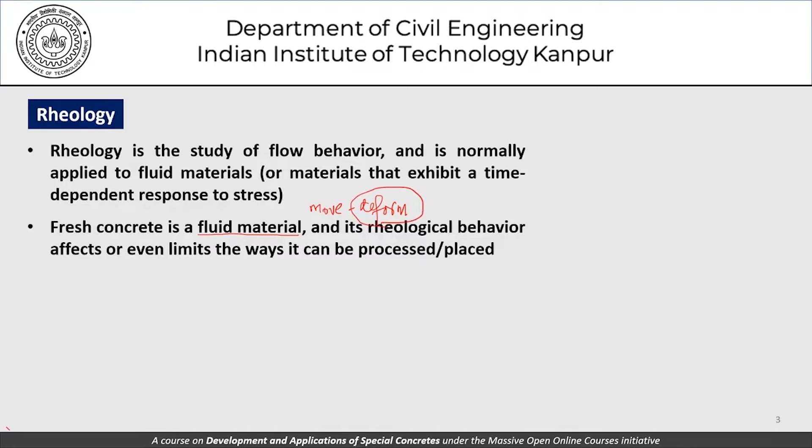When we say it's a fluid material, something like roller compacted concrete would be difficult to visualize as a fluid. Other concretes, self-compacting or not, do try to behave like fluids. But even with stiffer concretes, as we apply vibration and try to compact them, we expect the concrete to move and deform, and this deformation is also part of rheological studies. That's what we need to understand a little bit.

Even though I've made a conscious effort to stick to engineering and applications for most of our discussion, today's discussion is focused on the science part of it - what are the principles that govern the kind of behavior that we have?

Slump is a rheological measurement, but it does not describe the entire rheological behavior. Recall how the slump test is carried out - we fill concrete in this cone shape and then remove it. The concrete acquires a different shape, so there is surely some deformation, and to that extent it is a rheological measurement. Except that we don't use the words rheologists would use - words like viscosity, yield stress, and so on, which are closely associated with rheological measurements, as we will see today.

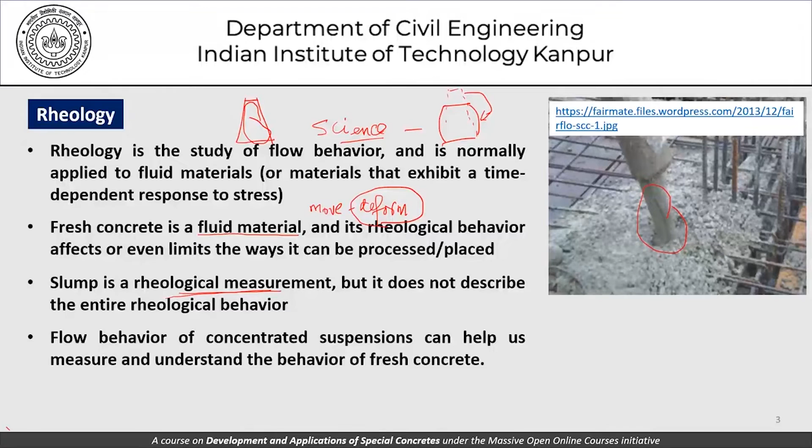Flow behavior of concentrated suspensions can help us understand and measure the behavior of fresh concrete. This fresh concrete is not a homogeneous material - it is heterogeneous, actually a concentrate of particles. It is not a single phase material; it has water, cement, sand, coarse aggregates, some chemical admixtures, and at times mineral admixtures thrown into it. So basically it is a suspension of different particles in water.

Instead of looking at concrete as a suspension of cement, sand, and coarse aggregate in water, the model I've been proposing is that we split this discussion into stages: paste is a suspension of cement and water, mortar is a suspension of paste and sand, and concrete is a suspension of mortar and coarse aggregate. So if we want to study the properties of fresh concrete, we can begin with a study of what's going on at the paste phase.

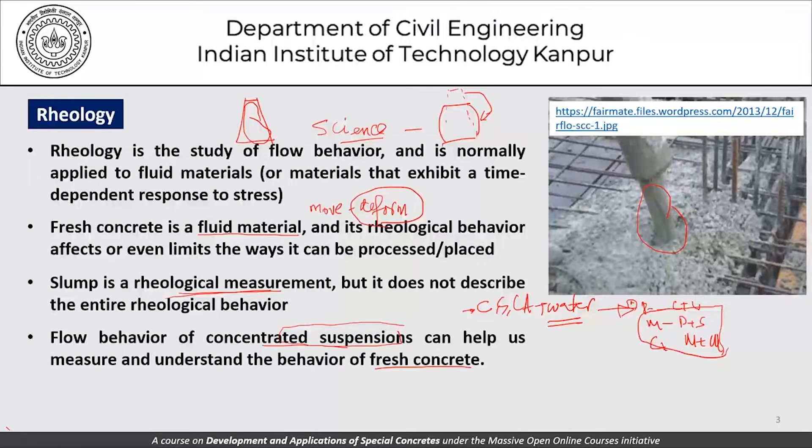How to measure the flow? The flow is typically measured using shear parameters of stress and strain rate, which are normally obtained from direct measurements of torque and flow rate in rheometers. So rheometer is the device that we commonly use in this branch of science, rheology.

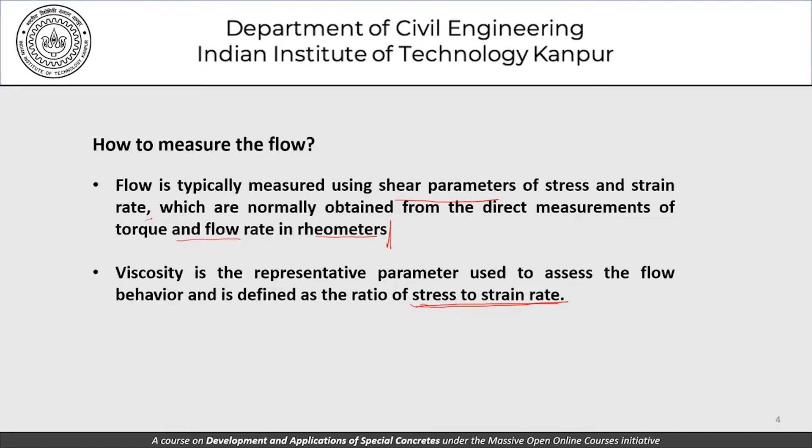Viscosity is the representative parameter used to assess flow behavior and is defined as the ratio of stress to the strain rate. Not stress to strain, but the ratio of stress to strain rate. That is how we are trying to define viscosity in the context of our discussion today.

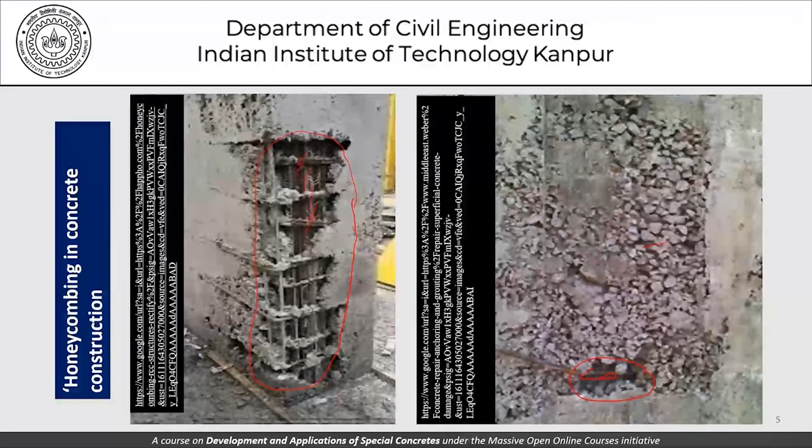But from the science point of view, what causes the concrete to move into all these places, either on its own weight, in which case it becomes self-compacting concrete, or on account of the application of vibration or compaction, carrying out external work as far as that concrete is concerned.

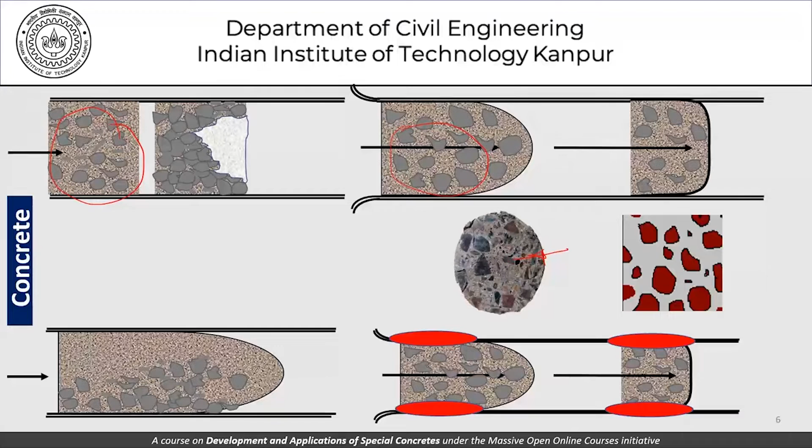These pictures again remind us that we are talking of concrete being a suspension of particles in water. We can look at it in different phases, and this is our hardened concrete. Beyond a certain point, concrete cannot be deformed so easily. It sets, gains strength, and so on.

And this is the real picture as far as concrete is concerned. The rest of it is all models, pictures that we draw to help us use scientific principles and write equations to predict or better understand the behavior here. This picture is for segregation, this is aggregate interlock, this is for development of boundary layers where we may have some deposition of materials. These are things we have talked about in earlier lectures also.

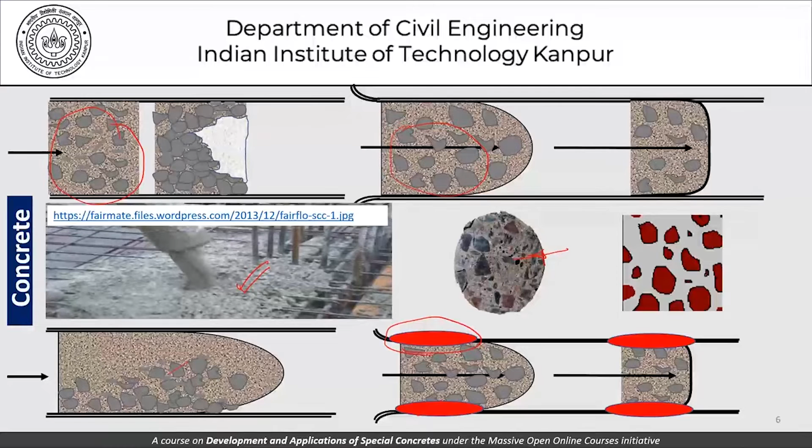Now the self-compactability part, relevant even from the rheological point of view—one thing we need to do is, on one hand, increase the water-powder ratio, that is, increase the water, reduce the powder. That will give us increase in deformation or deformability. So we increase deformability because that's what we want from concrete.

But as far as viscosity is concerned, we want to decrease the water-powder ratio, that is, reduce the water and increase the powder. So if there is a paste which has a lot of powder, that is, the solid component is very high, then it will be viscous and difficult to deform. Whereas if it has less powder, it will be much easier to deform, because that means this is more fluid—this is less fluid, if you want to use that word.

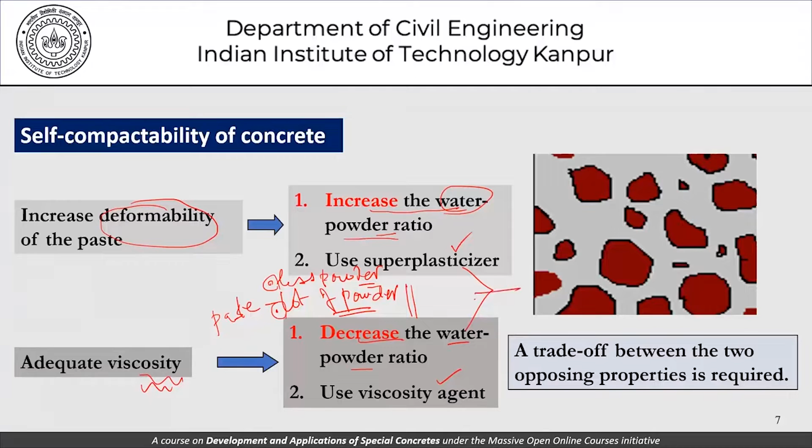This can be achieved using a plasticizer, whereas this can be achieved using a viscosity agent. So as far as real life application is concerned, we've been trying to talk about this all the time—we want to trade off between these two diverging requirements. This is just another statement arising from there.

When we use a plasticizer and reduced water-powder ratios, all that happens is that we need to restrict our coarse aggregate volumes. This is something we've talked about as far as most concretes are concerned.

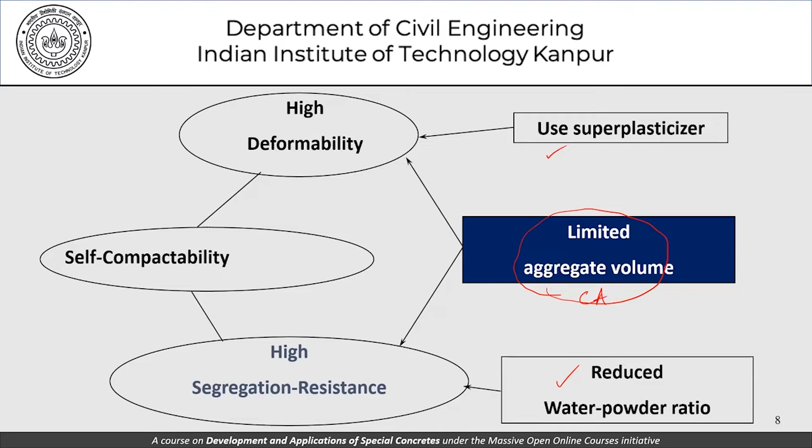This is some experiments done to better understand the tendency of blocking, especially near the reinforcing bars. Now these experiments need not be carried out using coarse aggregate themselves—we don't have to use coarse aggregates of 20 mm, because if we want to use 20 mm coarse aggregates, there are issues relating to the size of the equipment and, as you shall see, the details involved therein.

But if we are able to do some experiments the way they are listed here, for example, coarse aggregates in concretes are simulated by larger sand particles, and the concept is then extended to concrete. So the larger sand particles could be any diameter—it's not necessarily that we are sticking to a 4.75 mm definition for sand. We could use some particles and say, okay, this is how we are going to model it and move forward as far as our results are concerned.

Shown are the results from mortar tests carried out with varying sand content and hole diameters. Now what is the experiment? We fill this part with mortar—we have a cylindrical vessel, fill it with mortar, and we have a piston which has certain holes. 5 mm, 10 mm and 15 mm diameter holes were made in different pistons.

There is a cylinder of 100 mm diameter. In this 100 mm diameter cylinder, we are trying to drive a piston into a mortar, and this piston has holes of 5, 10 or 15 mm. This mortar has sand, whose particle size, gradation, and volume can be changed.

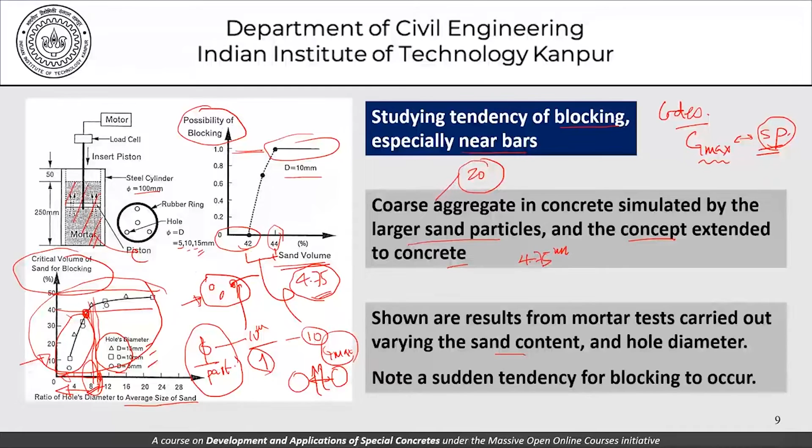So having discussed one set of experiments in the previous slide, let's discuss another set of experiments. Now this is carried out using a mini slump cone.

We know a slump cone for concrete has a diameter of 100 mm at the top, 200 mm at the bottom, and a height of 300 mm. The mini slump cone, which is used for mortar, measures 70, 100, and 60, as shown here. Please note these values are actually the diameters being shown.

We take different pastes and mortars at different water to powder ratios, varying the ratio and using either the cement paste or the mortar. We perform a mini slump test and measure the final area, which is the spread of the mortar achieved after lifting the mini slump cone off. We take the mean of R1 and R2.

The initial area is known since the initial diameter is 100 mm. From this we can find what is defined as the relative flow area, which is the final area minus the initial area, divided by the initial area. This becomes a measure of the flow.

If this relative flow area is plotted against the water to powder ratio, experiments show this is the line it follows for paste, and this is the line it follows for mortar.

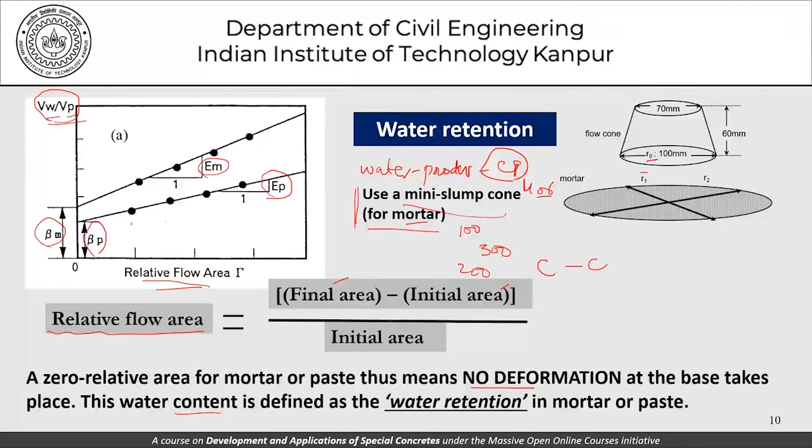These two experiments give insight into what engineers do to understand the flow behavior of concrete. We've insisted that concrete can be looked upon as a suspension of coarse aggregate in mortar, mortar as a suspension of sand in paste, and paste itself as a suspension of cement and similar particles in water.

Going backwards from here, we try to understand the properties of concrete. The importance of these tests is twofold: the effort involved is a lot less because we can work with smaller samples, like the mini slump cone. We don't use as much material, it's easier to carry out the experiments, and we can do more experiments in a given period of time.

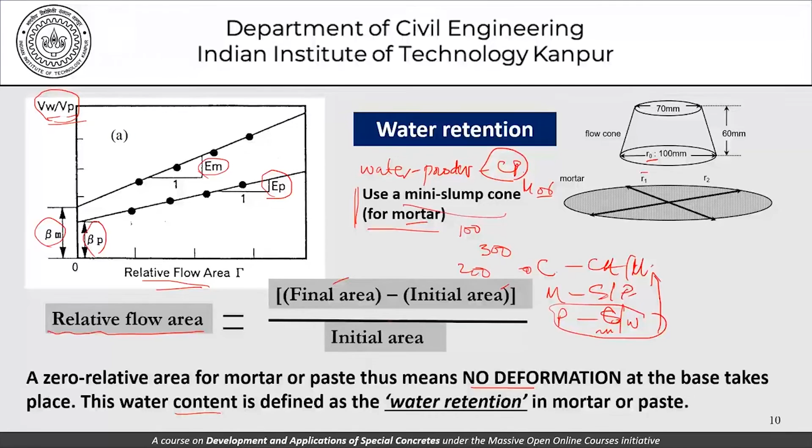With this background, we go back to our fundamentals. A suspension is solid particles dispersed or flocculated in liquids. This is exactly what cement paste is.

You'll recall I suggested an experiment where you take about a liter of water in a measuring cylinder and suspend or mix about 100 grams of cement into it. Don't worry about the water cement ratio — we're only trying to see how a suspension of cement particles in water behaves.

You can try this experiment now with this understanding, using cement, fly ash, or any other fine material, and study the characteristics of this suspension in terms of its flowability, depending on how much solid you add to it.

The key factor affecting the flow behavior of suspensions is the volume of solid particles, Vs, and an increase in Vs causes an increase in viscosity. As we increase the solid volume in this kind of suspension, we can expect an increase in viscosity and a degree of agglomeration or flocculation, which is a result of interparticle forces.

If you carry out these experiments, you will realize that there is a certain amount of flocculation that happens as far as cement is concerned, and that is what changes the behavior of the suspension for a given amount of cement that is being put into it.

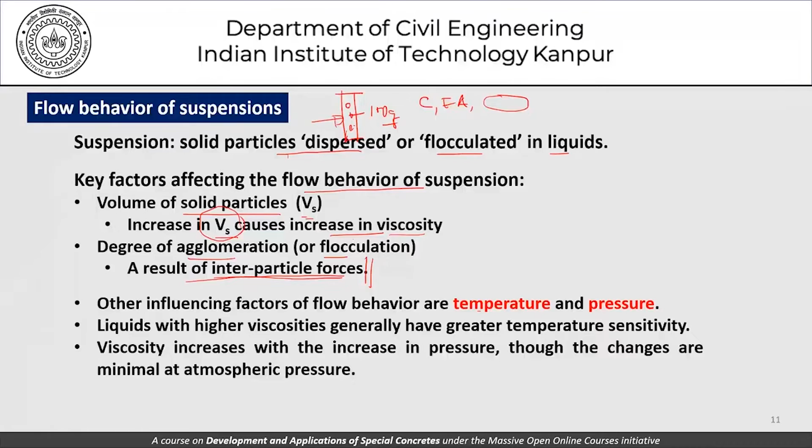Now, having seen some of the very simple engineering experiments relating to flocculation, relating to the behavior or the study of deformation in fresh paste and fresh mortar, let's try to get started with some real simple understanding of rheology.

As far as rheology is concerned, we are concerned with the behavior of fluids under stress. So what we do is we study the behavior of stress relating to strain rate. We have Newtonian fluids for which the strain rate and stress is linearly related, and we have Bingham plastic fluids for which the relationship is linear but with an offset. Then there are more complicated models like shear thinning or shear thickening, but we would largely be concentrating our discussion on these linear models, that is Newtonian fluids and Bingham plastic fluids.

As far as the basic constitutive relationships for plastic behavior is concerned, the Bingham model tells us that tau, which is the shear stress, is equal to tau naught, plus eta p times gamma dot. Now gamma dot is the shear strain rate that we are talking about.

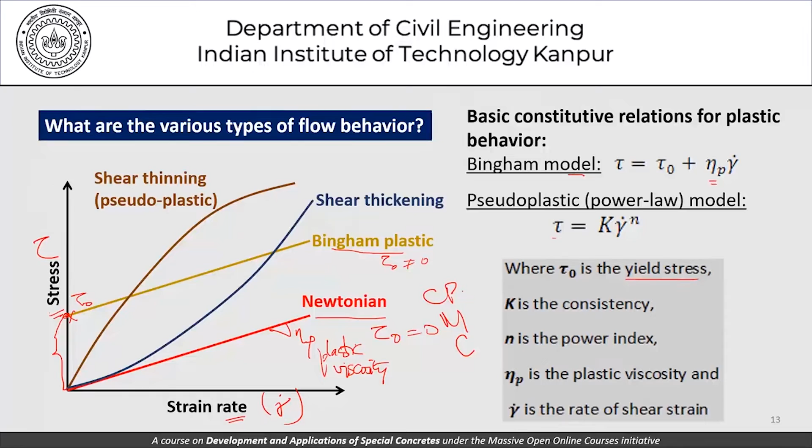Now, as far as the flow behavior of suspensions is concerned, recall that we have been always talking in terms of concrete being modeled as a suspension of coarse aggregate in mortar, mortar being modeled as a suspension of sand in paste, and paste being a suspension of cement in water.

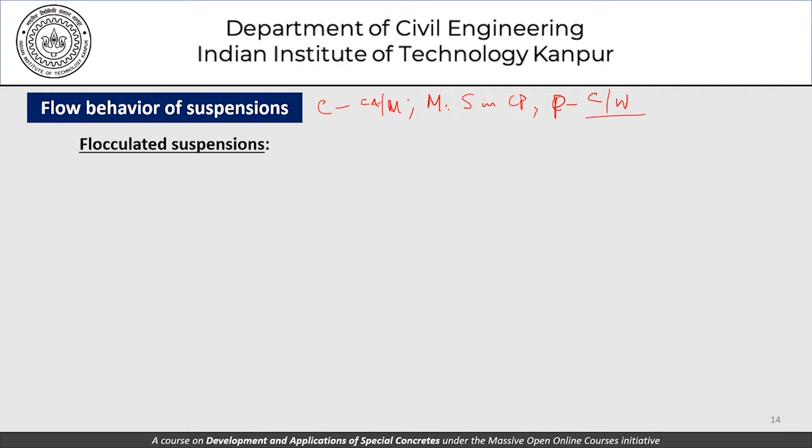Of course, now in this context, having done all these kind of discussions with self-compacting concrete and the different materials and so on, it is not only ordinary Portland cement that we talk about here, but cement-like materials. So the cementitious part of it, which contributes to the hydration and so on, is one part, and the powder part of cement, that is cement plus mineral admixture plus any other material which is fines. And fines, you recall, we have a definition of 0.125 mm and finer.

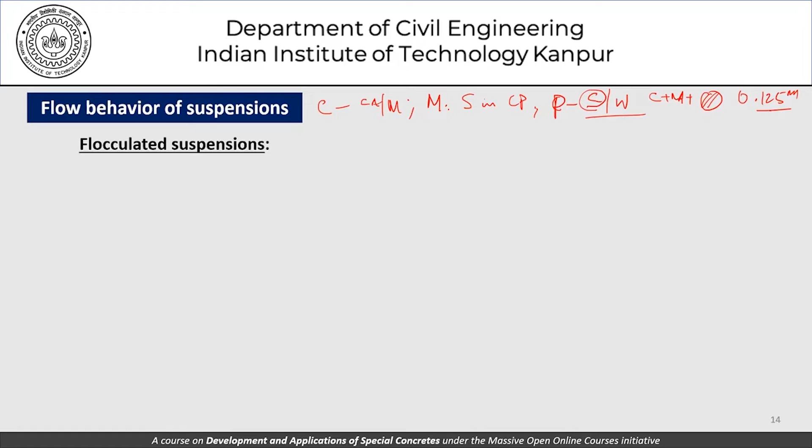All these fines would contribute to the paste as far as the workability characteristics or as far as the deformation characteristics are concerned. So there are two types of suspensions that we talk about. One is flocculated suspensions, and there we talk in terms of flocculation of colloidal particles, that is particles less than 1 micron in diameter that could result in aggregation or gel formation. Internal forces are weak, and the stress at which a breakdown of flocculated network occurs is called the yield stress, the tau naught that we talked about in the previous picture.

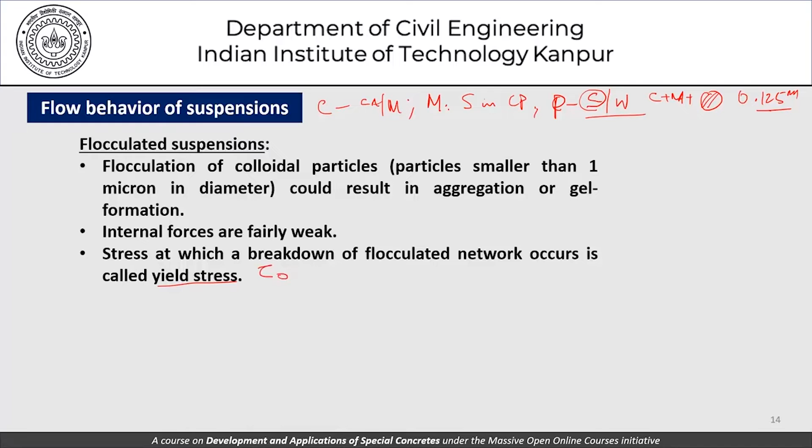When it comes to dispersed suspensions as against flocculated suspensions, they usually show Newtonian behavior at low solids concentration, and at high solids concentration they show considerable yield stress and exhibit plastic behavior due to crowding of particles.

Now what has to be seen is, when we talk in terms of cement paste, is it a low solid concentration suspension or a high solid concentration suspension? Recall the experiment where if we take a liter of water, about 1000 ml, and add say 100 grams or 10 grams of cement, this would qualify as a low solid concentration. This is what we vary when we talk in terms of the volume of water to volume of powder ratio. Let's stick to this experiment.

I had told you to look at this suspension of about 10 or 50 or 100 grams of cement and watch it settle down. This will tell you that this suspension of cement in water is a low solid concentration suspension, and the behavior of this kind of suspension would be largely Newtonian, that is, tau naught will be pretty close to zero.

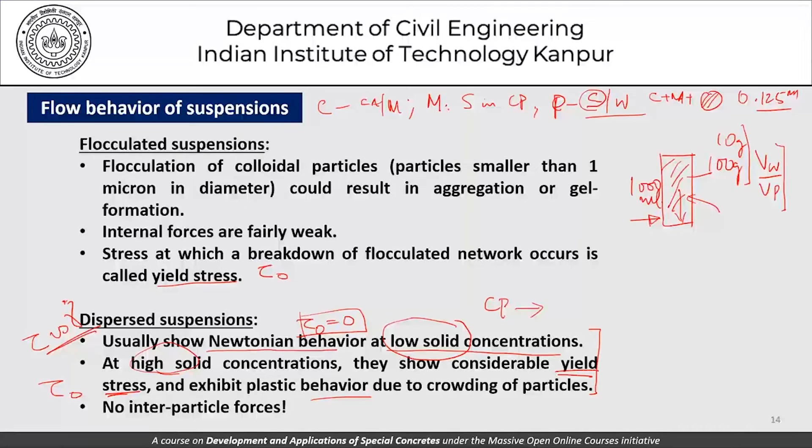Now coming to the behavior of cement paste, in general cement paste behaves as non-Newtonian dispersed systems, and the factors affecting the behavior could be physical, chemical, or other things. Physical factors would be something like the water-cement ratio, the cement grain shape and size.

The water-cement ratio really governs the volume of water to the volume of powder. We are used to calling it water-cement ratio, but as far as rheology is concerned, we had better start talking in terms of volume of water to volume of powder, because here we talk in terms of volume ratios, whereas the other is a mass ratio. So there is a density term involved, and we should be careful when converting one from the other.

Chemical factors would include the chemical composition of cement and its structural modification due to hydration. This part, when it comes to hydration, is an issue which is time dependent. That is, if we want to study the stress versus strain rate equations as a function of time, we will have structural modifications due to hydration, so we may have a certain slope in the beginning and some other slope in subsequent time domains.

Mixing and measurement conditions will also depend on some of these conditions. So as far as cement paste is concerned, it's a non-Newtonian dispersed system and can be studied in the framework of rheology if we keep these things in mind.

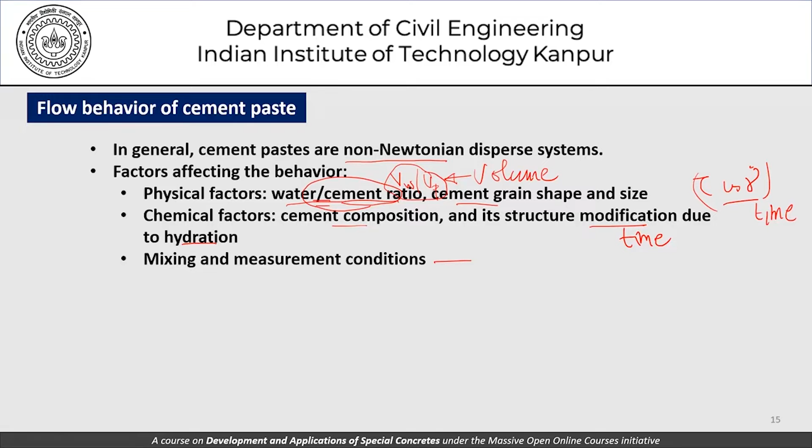Now coming to the kind of measurements actually carried out, we use shear rheometers. These instruments operate in rotation and measure the torque and rotational speed. There are two fundamental types: the coaxial cylinder type and the parallel plate type.

The sample sits in between these two plates and one of the cylinders or plates rotates. As shown here, there is a cylinder for the coaxial cylinder type and this is the parallel plate type of rheometer. The inner cylinder and the outer cylinder, the space here is where the paste, or the sample in a more generic sense, will be placed. Similarly, here we'll have a stationary plate and a moving plate, and in between we put the sample, that is the cement paste. The sample sits in between the cylinders or the plates.

The rheometers are run either on the basis of controlling the stress and measuring the strain rate, or controlling the strain rate and measuring the stress.

So it's very much similar to having the UTMs where we have displacement control and load control. In this case also we can either control the stress and measure the strain rate, or control the strain rate and measure the stress.

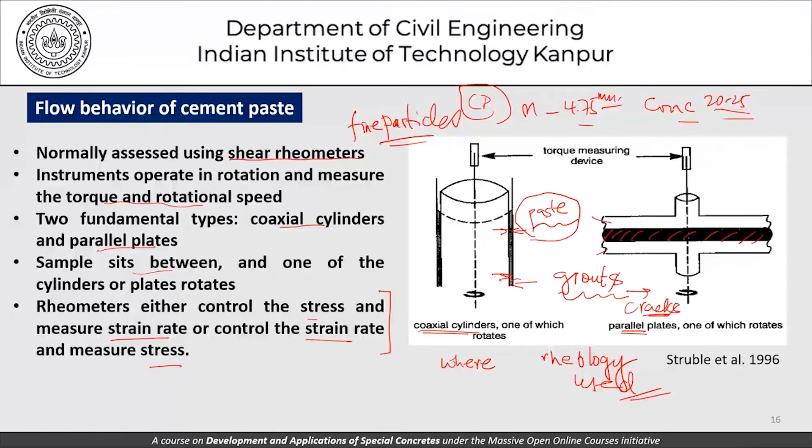As far as the cement paste is concerned, some of the common issues that are important while studying the flow behavior would include segregation of cement paste, which is more likely in plastic or pseudoplastic suspensions at high strain rates due to low viscosity. Segregation, of course, is less likely in flocculated suspensions at very high concentrations.

So it's more of a thought experiment. In fact, this whole lecture that we are going through today is more a matter of thought. We just have to close our eyes and think, okay, if this is what the cement paste is like, this is what we are trying to do with it, how will the cement paste behave? So if we have a very narrow slit here where we have filled cement paste, we rotate this cylinder, or we have filled the cement paste in this narrow gap between two plates and rotate this plate, how will the cement paste behave?

So the segregation is less likely to occur when the suspensions are having high solid concentrations. If it was low solid concentrations with lower viscosities, segregation is easier to occur. Some of these things which are intuitively obvious is what we try to establish numerically, because that helps us understand a wider range of possibilities that exist as far as cement pastes are concerned.

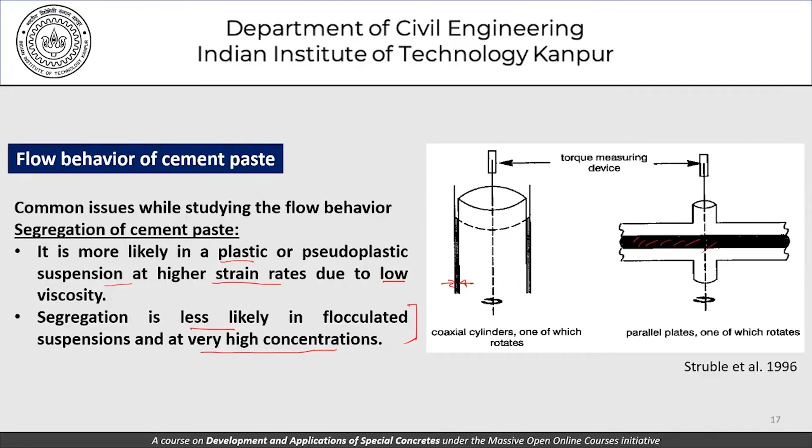So as far as the flow behavior of cement paste is concerned, studies have shown that it's a combination of the Bingham and the pseudoplastic behavior known as the Herschel-Bulkley model, and the equation that we try to use is tau naught plus k times gamma dot to the power of n. Remember that from the previous equations, when we were trying to use this power law, there was no tau naught term, whereas for the tau naught term, when we talked of the Bingham model, we said that there is a tau naught, but this part was linear.

So it's more a combination of the linear and the non-linear models with the tau naught here. This possibly represents the behavior of cement pastes. When dispersed using a superplasticizer, cement paste shows Newtonian behavior at low concentrations and plastic behavior at high concentrations.

Part of it is something we've discussed earlier: if we have cement particles in water, they often flocculate together. I explained this discussion of flocculation of cement particles in water when we were doing the initial mix design. What we said at that time was that this flocculation results in entrapment of water between the flocs, and this water is not available for workability.

Therefore, if we use a superplasticizer or a chemical admixture to release this water, how do we do it? We try to induce repulsion between these particles, and these particles are separated from each other. So this water becomes available for workability, becoming part of the other water sitting outside. With the plasticizer, the amount of water available for workability is much more.

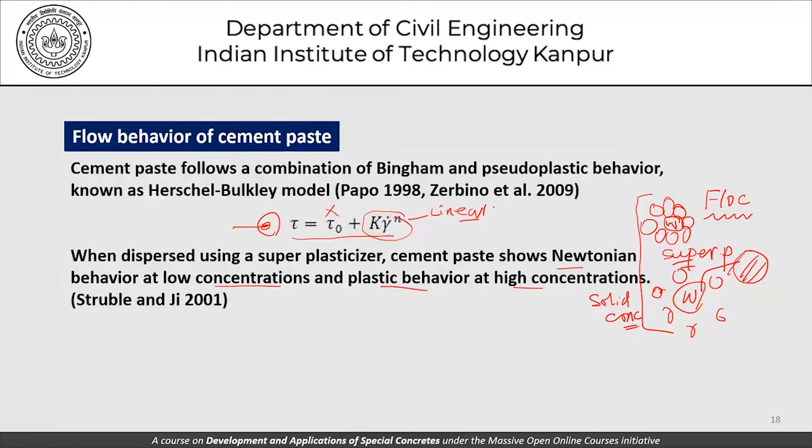Now in the present context, what is being said is that if this water becomes available, even though the solid concentration still remains the same, because we are not changing the cement content per se, the cement paste would become Newtonian, showing a slightly higher tendency for segregation. It would become a more Newtonian fluid, showing lower levels of yield stress than in the case where this flocculation was happening.

While assessing the flow behavior, there could be some hysteresis in the stress when the strain rate is increased from 0 to higher values and brought back to 0 after reaching the peak. This reflects the lack of equilibrium between the microstructure and the strain rate, and denotes that the material is undergoing irreversible structural breakdown due to shear.

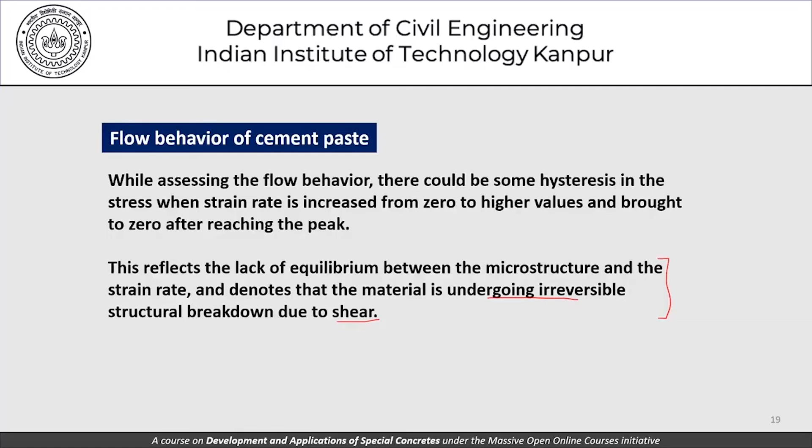In the case of cement pastes, when we do these experiments, these are the kind of places where we need to keep in mind the hydration, which will cause different behaviors as we repeat the experiment at different points in time, either by loading and reloading, or just carrying out the experiment at different points in time.

As far as concrete is concerned, now we are moving from cement paste to concrete. This graph shows the torque and the angular velocity, which are basically the same parameters as the good old stress and the shear strain rate. So concrete exhibits plastic behavior. A typical flow curve is shown here. So here again we have the same idea that there is a tau naught, and this behavior is more or less linear.

So concrete shows plastic behavior. A typical flow curve is shown. In concrete, particles cover a broad range, from micron-sized cement particles to centimeter-sized aggregates, and the flow characteristics depend on the concentration of particles and the extent of flocculation of cement particles.

Now this extent of flocculation of cement particles effectively alters only the properties of the paste. But this change in paste properties also has a cascading effect on the properties observed for the mortar and the concrete. So flocculation is important only for the finer particles.

We already know that the range of strain rates during testing should be low so as to simulate actual field conditions in terms of processes such as mixing, transportation, placing and finishing. So this also tells us that for engineering operations such as mixing, transportation, placing and finishing, these can be looked upon as processes where we try to deform the concrete through the application of certain strain rates.

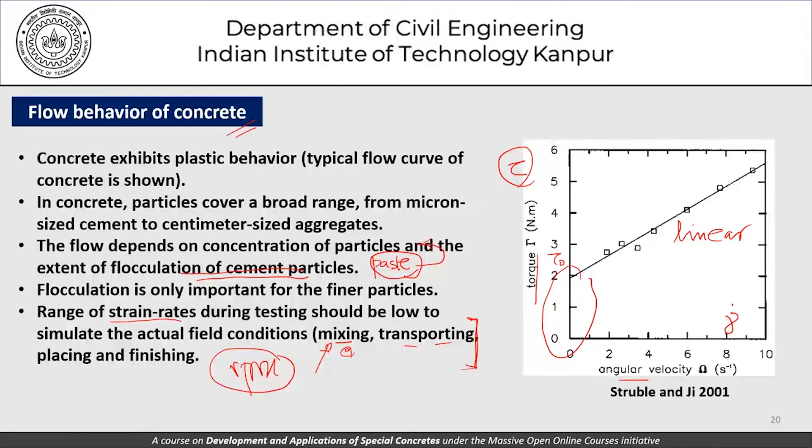Continuing with our discussion on the behavior of concrete, the flow behavior must be described using the yield stress and plastic viscosity model. Coarser particles tend to settle due to gravity, and segregation is more likely to happen during shear.

Slip near the walls of a rheometer could be aggravated due to a larger gap, which is necessary because of coarser particles. We are alluding to the importance of figuring out what the gap should be, and what problems arise if the gap becomes larger. The slip near the walls could be aggravated due to the larger gap, but we cannot live without a larger gap because we have coarser particles in concrete. So when it comes to concrete and rheological studies using an appropriate rheometer, these are the kind of problems which a scientist or researcher faces.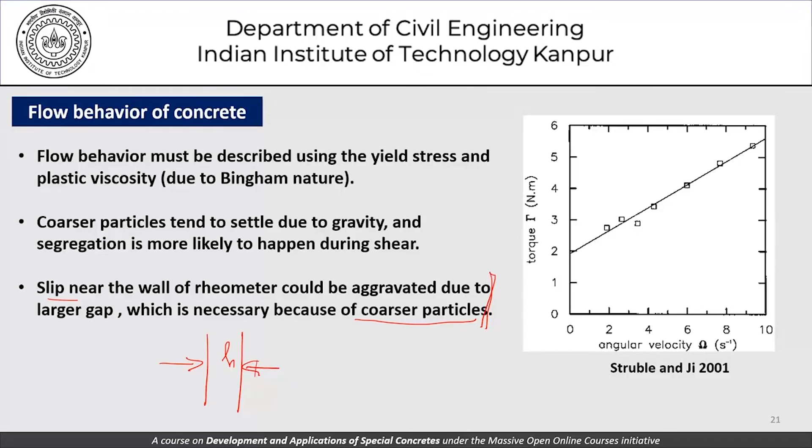So what are the kind of factors that affect the flow behavior of concrete? One of them is very obvious, the water-cement ratio. Increasing the water-cement ratio results in a lower yield stress and plastic viscosity. This means increasing the water, which in rheological studies would boil down to increasing the volume of water to the volume of powder ratio. In concrete terms, it's water-cement ratio. If we increase this, we are increasing the water volume in the system, which results in a lower yield stress and plastic viscosity.

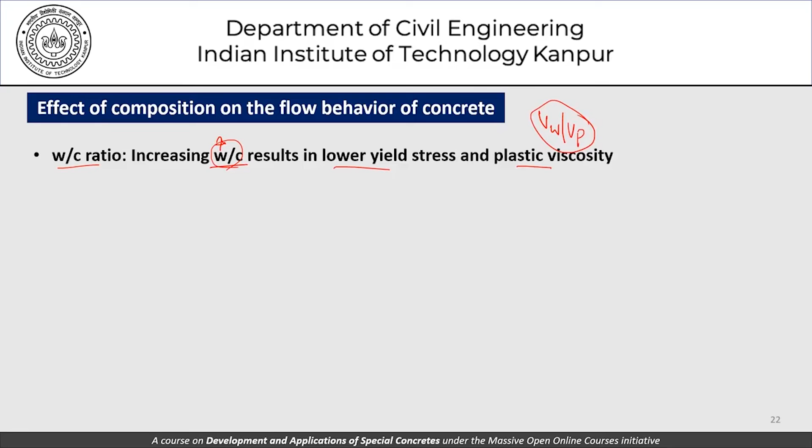The total aggregate content: if we increase the total aggregate content, we increase the plastic viscosity. This plastic viscosity term, remember, is the slope of the straight line we talked about, where it is tau naught plus the slope times the shear strain rate. So this plastic viscosity is the slope of this line.

Aggregate type, of course, also becomes important. Concrete with river gravel, which is much more rounded and smoother, has lower viscosity and yield stress values compared to concrete which has crushed stone.

As far as the sand content is concerned, both the yield stress and the plastic viscosity follow an initially decreasing and then an increasing trend with increase in sand content. The minimum has been found to be at a sand content of about 38%, but that number could be a function of the kind of sand we use, and the other materials used. It's a guiding principle that this is the ballpark number we can expect, on either side of which the yield stress and viscosity would tend to increase.

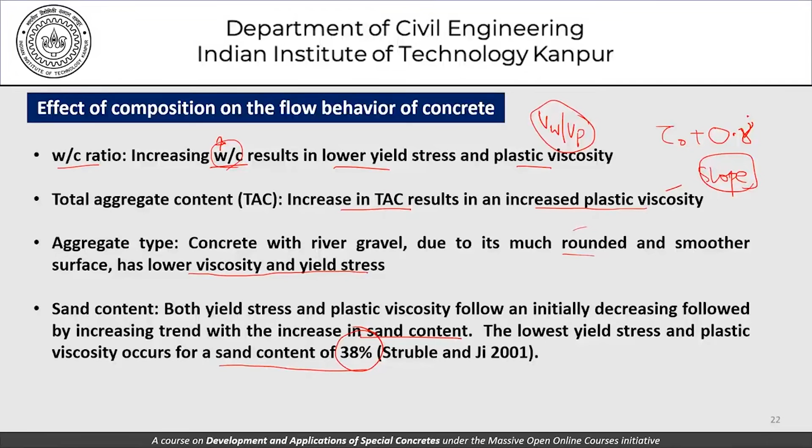As far as admixtures are concerned, we could replace cement with fly ash. If we use fly ash, we could probably reduce the yield stress and plastic viscosity because of the nature of the fly ash particles. If we use another mineral admixture instead of fly ash, this reduction need not happen. When it comes to a superplasticizer, its addition reduces the yield value of concrete and the plastic viscosity. We discussed this earlier, when we said that the use of superplasticizer essentially releases the water present within the flocks for workability, and in the context of rheology, this means the yield value and plastic viscosity go down.

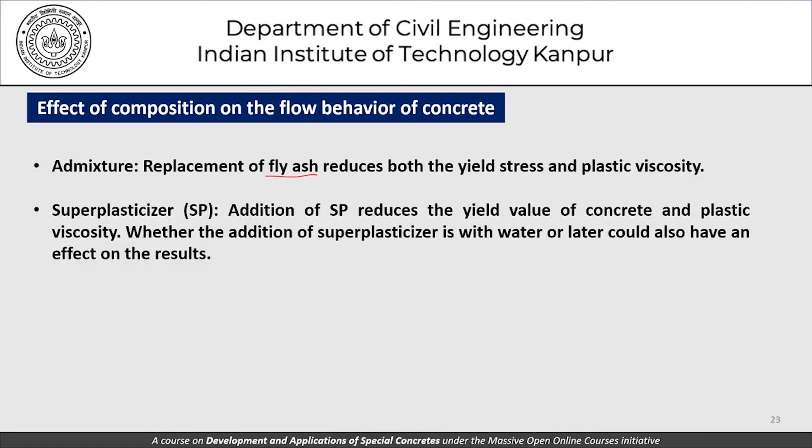However, whether the superplasticizer is added with water or later could also have an effect on the results. This means whether the plasticizer is added to concrete with water at the time of mixing as a single shot, or used in stages, would possibly also be an important factor in the effect on the yield value or the reduction in yield value and plastic viscosity.

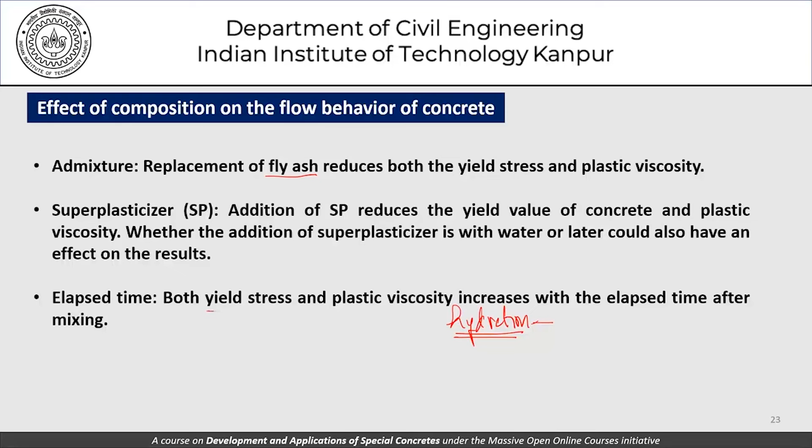Elapsed time: both yield stress and plastic viscosity increase with elapsed time after mixing. This is a direct reflection of the hydration that happens. The hydration does not necessarily mean it will suddenly become hard, but the concrete is still hardening, and that hardening process in rheological terms is reflected by an increase in the yield stress and plastic viscosity values.

As far as shear induced flow in fluids is concerned, there are four models which are often used: flow between two parallel flat plates with linear motion, flow in the annular gap between two concentric cylinders, flow between two parallel flat plates with rotation, and flow through pipes and tubes. These models have been used to study the relationship between shear stress and shear strain rates.

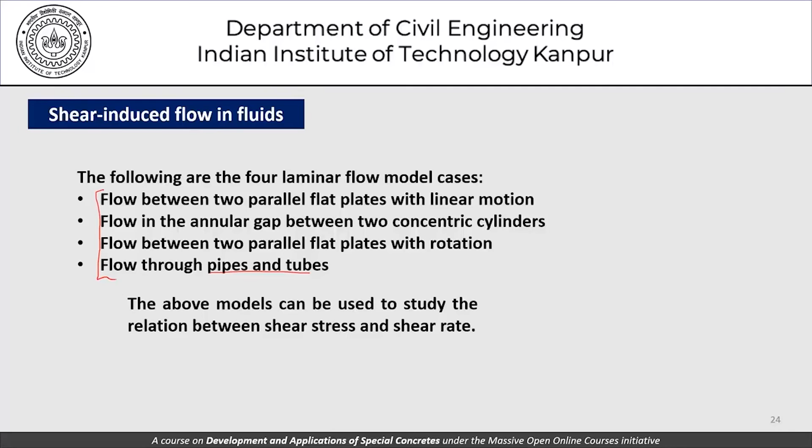In analyzing the flow behavior in concretes, or for that matter any fluid, the following are the basic requirements. One is homogeneity of the sample. The sample must be such that it shears uniformly throughout.

In case of suspensions, all ingredients should be very small with respect to the thickness of the sample. To ensure the measurement in suspensions, the shear gap is normally kept very low. The composition and particle size distribution of the sample dictates the shear gap.

This is something we have alluded to briefly when we talked about the gap between the coaxial cylinders, or the distance between the stationary and moving plates. This is obviously related to the size of the particles. In our case, if we are talking of cement, the particles are extremely fine, but the moment we start getting into mortar, we have to be very careful about the kind of gaps we are talking about.

Laminar exchange of volume between the layers should be prevented, and there should be no slippage between the sample and the plate. So these are the basic requirements when we talk about analysis of flow behavior.

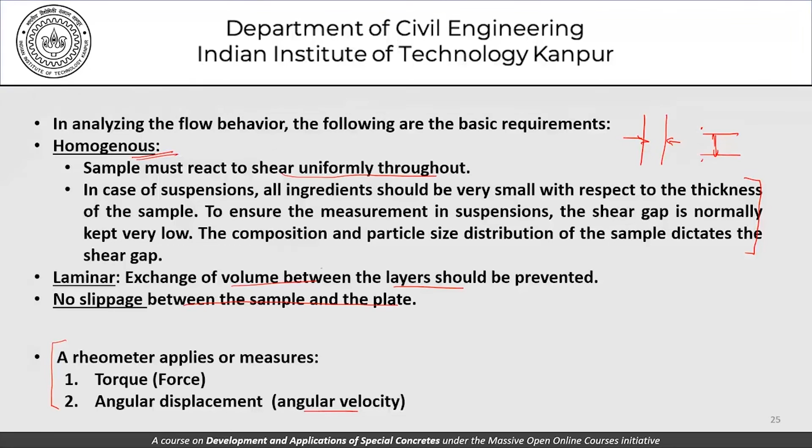The rheometer, or the equipment that we use, applies or measures the torque, which is the force, and the angular displacement, which could be angular velocity. So these are the two things, and we could vary one independently and measure the other as a dependent variable.

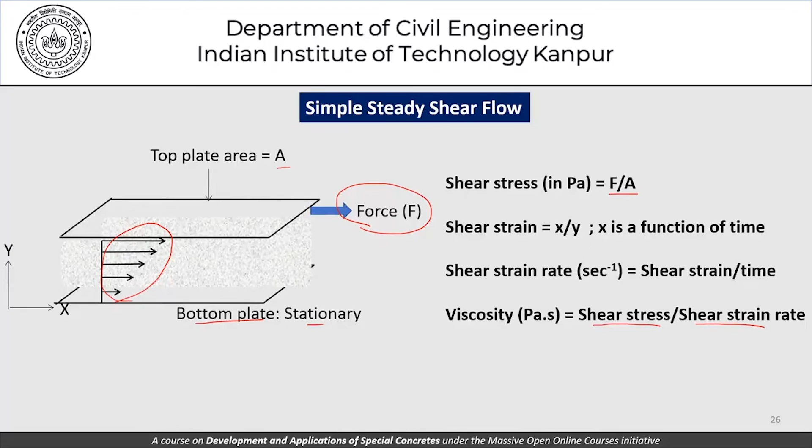The shear strain is x upon y, with x being a function of time, and the shear strain rate, which is per second, is the shear strain versus time. The viscosity is defined as the ratio of the shear stress and the shear strain rate. So that's how we analyze a simple steady shear flow.

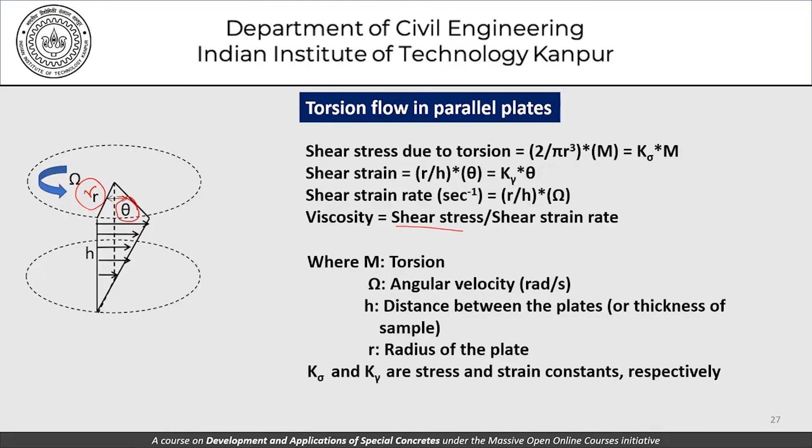From a linear parallel plate, if we talk in terms of a torsion flow in parallel plates, the situation becomes a lot more complicated, as we have a variation in R as well as the theta directions. So the shear stress and shear strain rates are defined in more complicated ways, except that the principal viscosity, being the ratio of shear stress to shear strain rate, still remains the same.

Let me move on and show you the basic structure of a parallel plate rheometer, which is ideally suitable for materials that may slip, very low viscous fluids, and samples with larger particles. Here the gap between the plates is h, with a stationary plate at the bottom and a rotating plate on top.

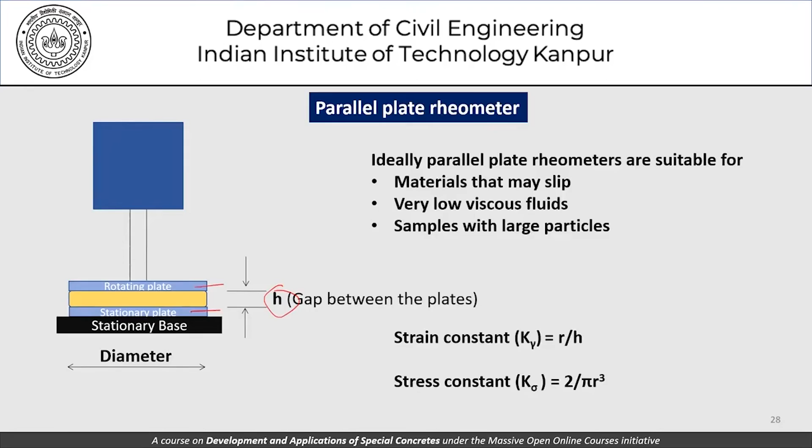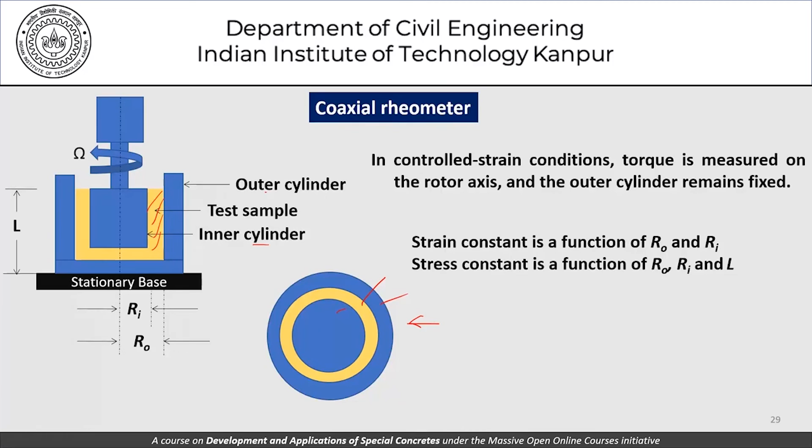Another type of rheometer is a coaxial rheometer, where we have an outer cylinder and an inner cylinder, and in between that we put the test sample. In plan, this assembly looks like: outer cylinder, inner cylinder, and the sample in between. In controlled strain conditions, torque is measured on the rotor axis and the outer cylinder remains fixed. We try to rotate the inner cylinder and measure the torque.

As far as commercially available rheometers are concerned for measuring or testing fresh concrete and mortar, there are coaxial cylinder types, the Tattersall apparatus, the BML viscometers, and the BTRHEOM rheometers. I don't want to get into the details of each of these.

The next few slides I'm going to quickly show you those viscometers or types of apparatus that we use, and leave it to you to do some reading on your own. The whole idea of this exercise today was to introduce this important field of rheology to a concrete engineer. We carry out the slump test or the slump flow test without blinking an eye.

But what we must remember is that there are scientific issues involved. There are principles of viscosity involved which can be measured. It's not that they cannot be measured.

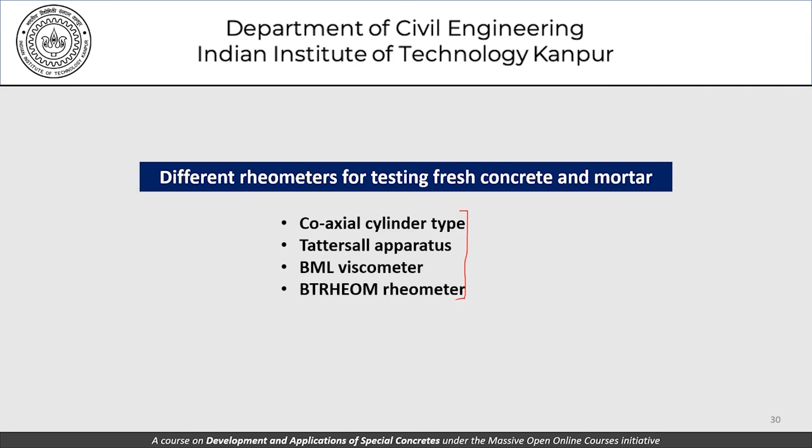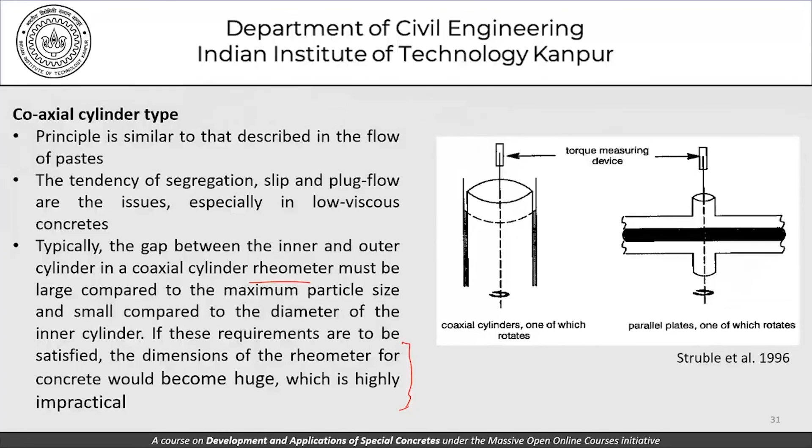The picture and schematic representation here is that of a coaxial cylinder type of device, where the principle is similar to what has been described before. The tendency of segregation, slip, and plug flow are the issues, especially in low viscous concretes, and typically the gap between the inner and outer cylinders in a coaxial cylinder rheometer must be large compared to the maximum particle size we're talking about, and for concrete that sometimes becomes unwieldy. It becomes a very large system. So we need to be careful about the maximum size of particles that we can use when testing concrete for rheological measurements using this device.

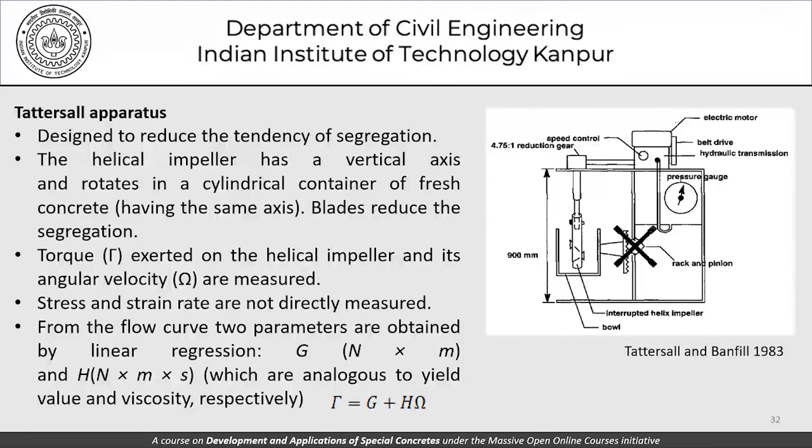As far as the Tattersall apparatus is concerned, this is designed to reduce segregation tendencies, and we use a helical impeller and so on. I don't want to get into the details of this; that's not the purpose of this course, and the intention is only to give you a glimpse of the kind of measurements people have carried out earlier to better understand the deformation of fresh concrete.

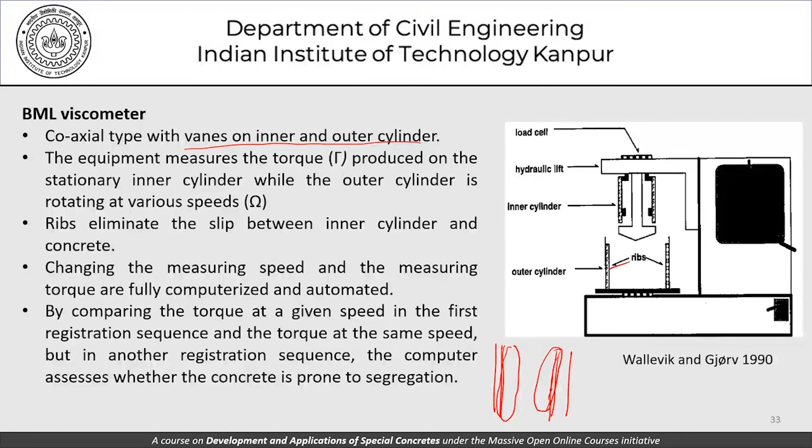Having said that, please remember that these are equipment very rarely used in real engineering practice, except for research purposes. Beyond the lab, if we want to test our hypothesis, if we want to test the kind of data we've got from the labs, we really need to go to the site, and for that we need to carry this equipment to the construction site, because it's not possible to get the concrete from there to the lab in a reasonable time frame.

So the idea of all this discussion today was to introduce you to this very important, very interesting field of rheometry, where we study the deformation of paste, mortar or concrete, and try to study the flow characteristics in an effort to better understand segregation, flowability, viscosity and so on for fresh concrete.